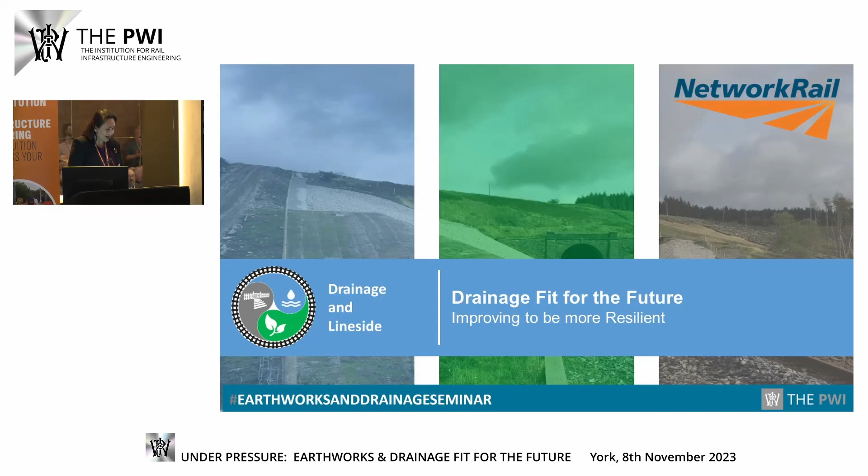I want to talk a little bit about our approaches, why we did those approaches, what we hope to achieve, and what still is left to do. And the first thing for me that was really clear is regardless of incidents and changes and recommendations, if you want change, there must be a desire and discontent to change, because otherwise you're shoving things down people's throat and it ain't going to work. We all have to say, actually, we do want to change, and therefore we will change. And so some of the things I'm going to talk about is how we've done that and what's there going forward.

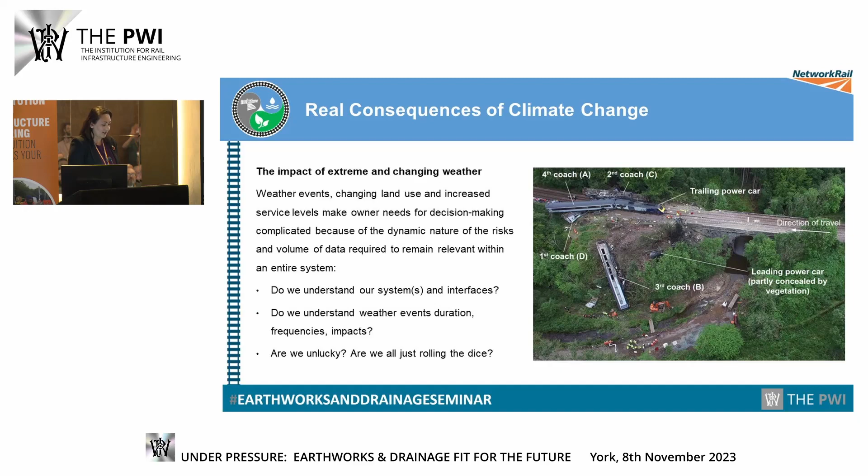You've recognized the photograph from a very recent presentation that you've just seen. That is Carmont. Carmont was a massive catalyst for us to actually accelerate some of the things that we were already working on. As Juliet had mentioned, there were things in the pipeline. There were things that we were already talking about doing. And post Carmont, with the recommendations both from RAIB, internal, as well as the task force, that accelerated the delivery of some of the things that I'm going to show you and talk about in this very limited 20 minutes. And happy to talk more with some of you about what else we're doing outside of this.

So we've got some massive challenges, right? Climate change is here. It's now. It's not a project thing. It is actually here. We have more extreme and adverse weather events, unpredictable weather patterns. Where's the water going to be? How much is going to be? Where is it going to go to? We have heat as well as too much rain. We're going to see intense rainfall covering shorter periods of time, and we're going to see longer, hotter summers. So you almost have too much water or not enough water.

We have legacy assets. There's currently about 500,000 drainage assets recorded in Ellipse, our master register. These drainage systems were designed on older standards that didn't consider climate change and the resilience that was needed. So these assets that are currently in the ground are tested in these extreme and adverse weather events. Sometimes we don't pass those tests. And the frequency and intensity of that testing is happening more and more. So we've got a massive challenge here around legacy, moving forward and changing the approach that we are using for the design, construction, the evaluation of drainage.

So focusing specifically around drainage and rainfall, the consequences of extreme and adverse weather events are failures not just for the drainage system itself, over-exceeding, flooding, etc., but it has a consequence on other asset groups. So washouts, landslips, wet beds, track geometry faults, track electromechanical faults, water and electricity don't get on. You see a lot of negative impact when drainage doesn't perform as it should on the railway as a system as a whole. And so following on from what Julian said, it is one system, the drainage system sitting in the railway system. We should not look at things in isolation here.

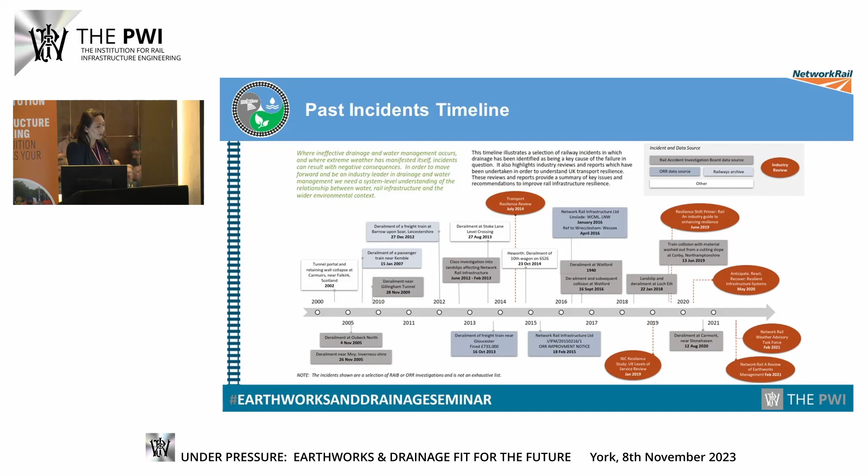And you see there's a lot. Almost every 2 years there was an incident. So that's quite a lot. There's quite a rich history, a lot of reading and context. So why aren't we quite learning from these past incidents? What is going on? I think there's two things that happen.

One, if we look at an incident in its own self, you only stick to the events that are in that one incident, and you don't start to look at the wider picture, the patterns of what's happening in other places. So you could lose that learning if we just focus on one thing. So look wider. Where else is it happening? What's the bigger picture telling us?

The other thing is, if we only look at it from an asset-specific silo perspective, it's a drainage failure, it's an earthwork failure, it's a track washout, we lose the causal relationship that is there in some of these. We don't live in a seismic zone, so earth doesn't usually move on its own. It's something that's creating that movement. I say to you, it's water. Where is it coming from?

Rain, saturation, oversaturation, etc. Ballast doesn't just wash out one day because it just doesn't feel like being where it wants to be. It's water and the energy surges, that potential kinetic energy that's pushing that stuff away. We need to recognize that and appreciate that, and we need to manage it. We need to manage it today and move forward.

So looking at these, and these are not all, by the way, these are the big ones. These are the RAIB reports, the ORR reports. These are not all the incidents. We have internal reports as well that we looked at. There's a theme that appeared a few times: not having an effective strategy, competency, weather exceedance, exceeding our expectation. We were caught unawares. We weren't aware that this was going to happen. Those started to have causal links, so recommendations leading to other recommendations leading to others.

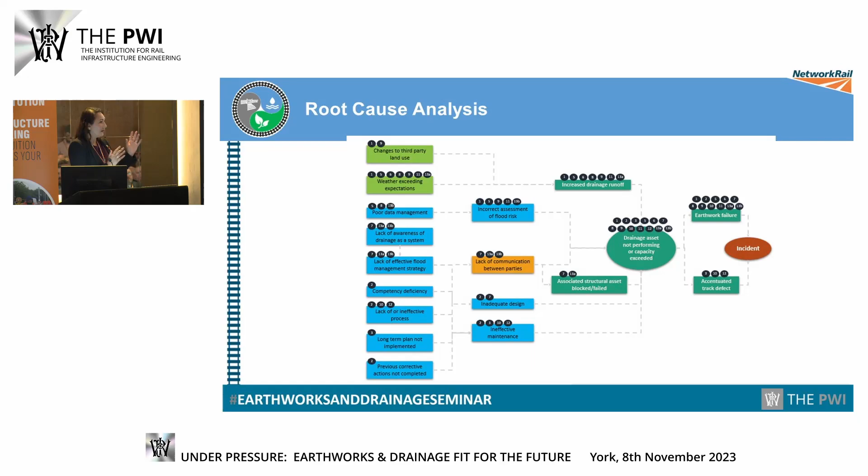Well, I'll tell you now, this is one sexy bitch up here, right? Not me, drainage, right? She's causing all sorts of problems out there on the railway. And she's high maintenance as well, let me tell you. We need to focus on her because she's causing some problems.

I said I wasn't going to swear, I just swore, sorry. Where's Peter? He doesn't have to wind me up. Yeah, you don't have to wind me up. There you go. You get £1.

So multi-pronged approach. Okay, how are we going to address this? Not just Carmont recommendations, but past. Let's learn together. So let's make a change. Let's not be where we were. Let's not repeat the past. Let's move forward. So it sounds a bit boring, but strategies and policies.

Well, the purpose of a strategy is your long-term vision. So we want to change, but what do you want to change into? I don't know. I just know I'm not happy with what's happening now. Okay, so the first question you need to know is, well, what do you want to be and where do you want to go? So that's what the drainage technical strategy was.

As a collective group, we got together. What are we not happy with? And just get it all on a piece of paper or Miro board at the time. Just get it all out. It's very therapeutic. This isn't right. That's not right. This isn't working. Great. Well, let's flip that now.

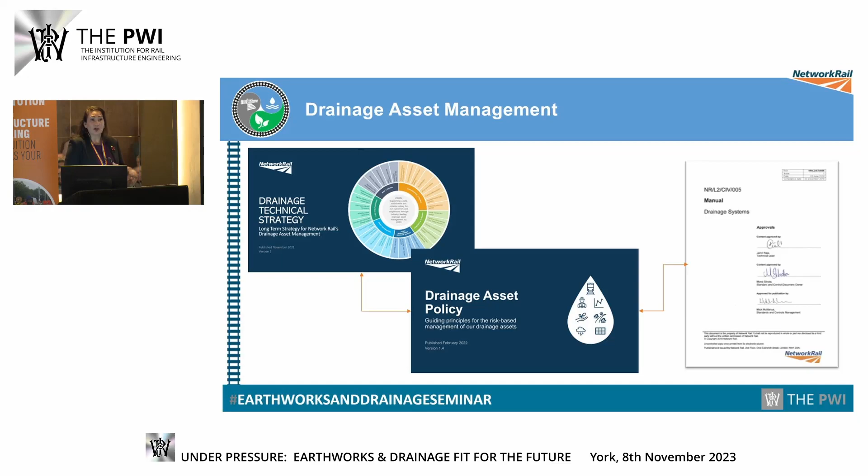So challenges we got for CP7, what are we going to do? We need to mature. We need to carry on chipping away at getting better and better at our maturity. We need to start applying those adaptive approaches to our business planning to say, if I get this amount of funding and I deliver this bit of work, I'm going to achieve these benefits and get those benefits, start measuring those afterwards. So that's happening at a very, very high level.

More detailed level, we're updating the standards to strengthen our terminology around what is vulnerable assets, what is catastrophic failures, what are we talking about when we talk about different intervention levels. And we're also updating our standard detailed drawings to provide better designs, more blue-green solutions, more solutions that think about how water and drainage's components can possibly fail.

So what we're talking about here is, for example, let's not put French drains on steep slopes with infill material. We're just creating water slides that are pointed right at the track. Let's do something differently in that space. And what is that difference? That's the sort of things that we're doing right now. So that's still coming in the next sort of year or so.

In doing just the drainage work, yes, water is managed by drainage, but it is not the only asset group that manages water. Water influences track, signaling, electrification, earthworks, every asset group and every function on the railway: design, inspect, maintain, construct, evaluate, all are impacted by water.

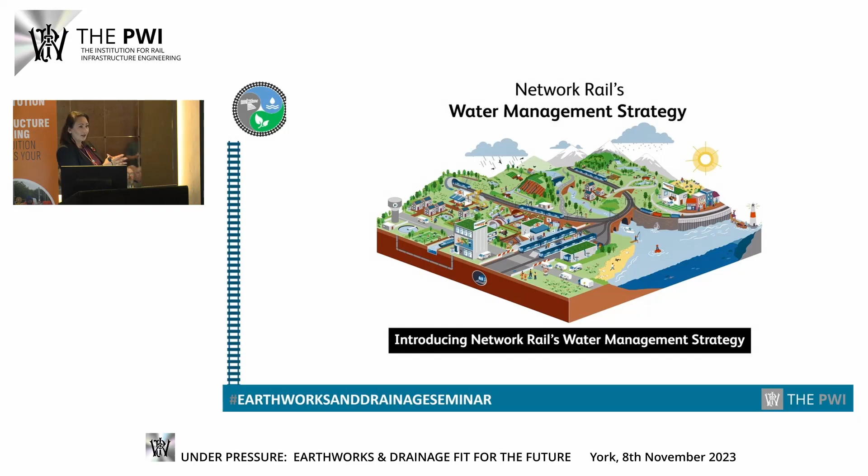And so what we realized is that in just writing a drainage technical strategy, we weren't addressing the big railway and water interfaces. We could only do it as an asset. And so in Network Rail, we pitched to the chief engineer that we needed a national level water management strategy. And I'm going to play a little video for you on that now.

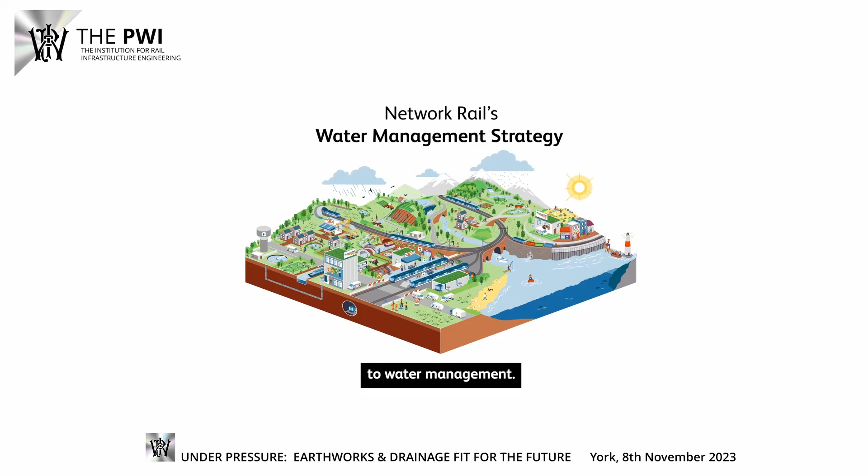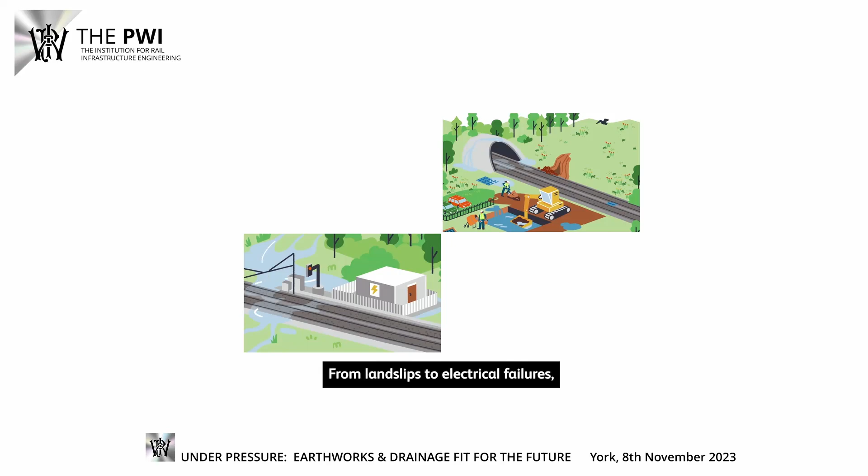Introducing Network Rail's water management strategy. This strategy is going to change our approach to water management. But before I tell you more, this is why we need it. Climate change is happening now, making the consequences of extreme and adverse weather a reality for all of us. Flooding and droughts already cost Network Rail millions of pounds a year and are only likely to get worse. From landslips to electrical failures, weather-related incidents affect the safety and performance of the railway, resulting in penalties, delays, poor environmental impacts and a disrupted service for our passengers.

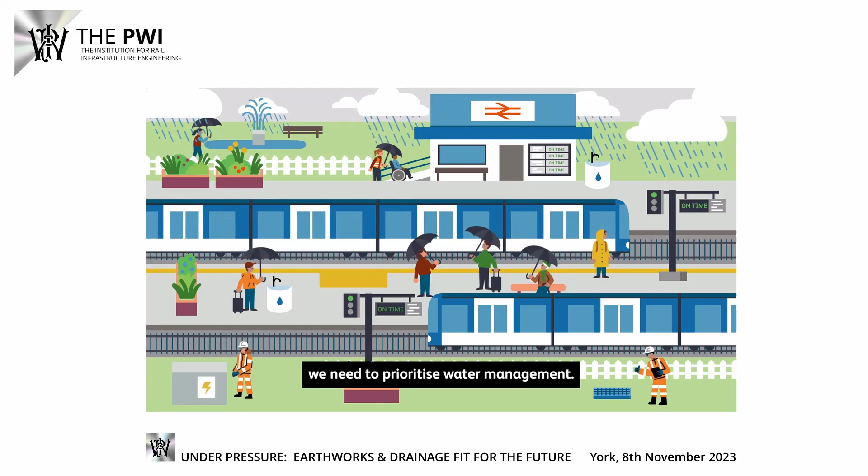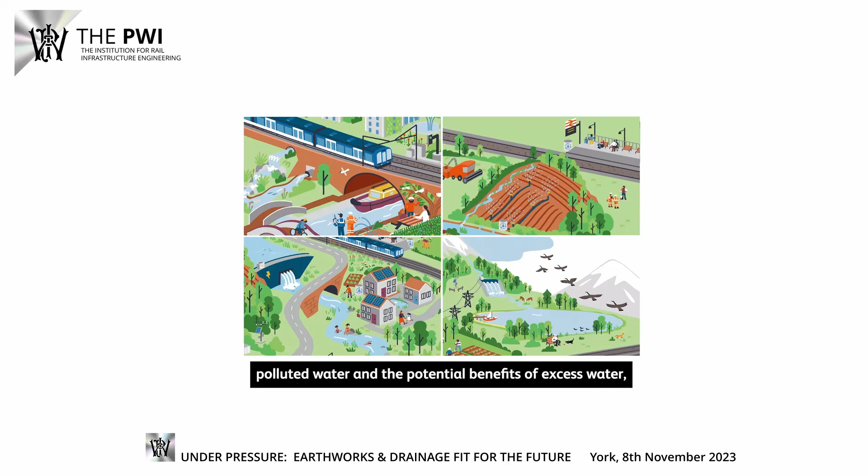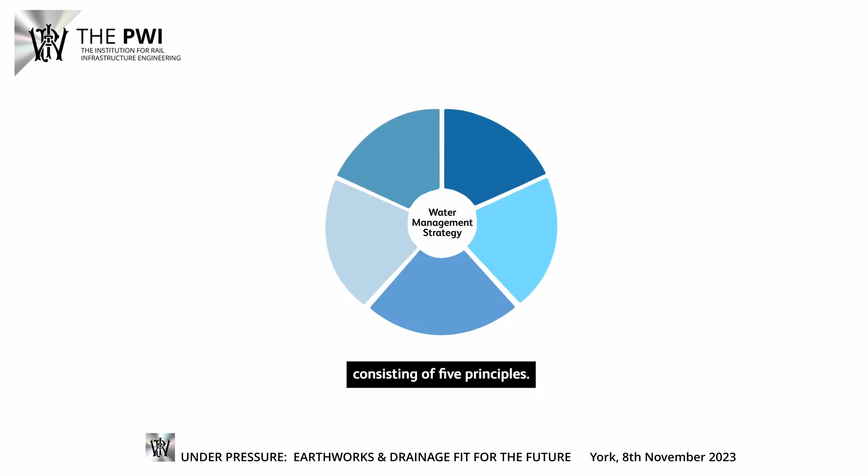But we can improve. Network Rail is committed to running a reliable railway network. To do this in today's world, we need to prioritise water management. This means dealing with the water that affects all of our railway assets. We need to grasp the wider challenges of water scarcity, polluted water, and the potential benefits of excess water, in collaboration with our neighbours. We've developed the water management strategy consisting of 5 principles. These are: take a holistic view, be resilient, use less and recycle, keep it clean, and unlock wider benefits.

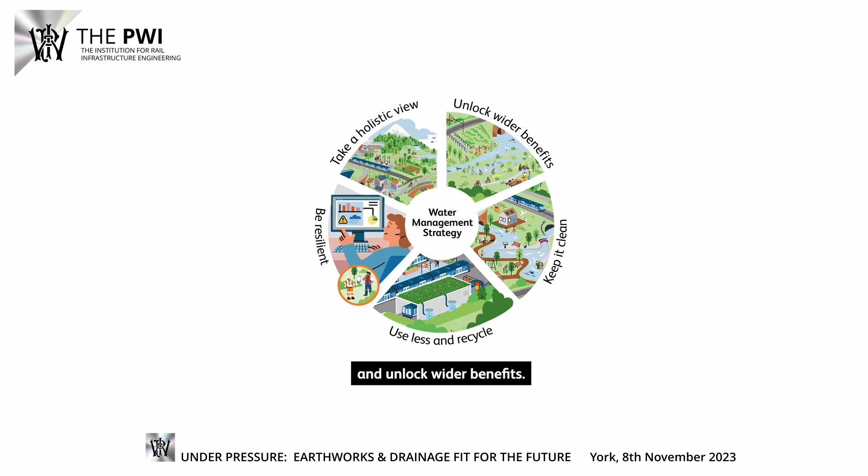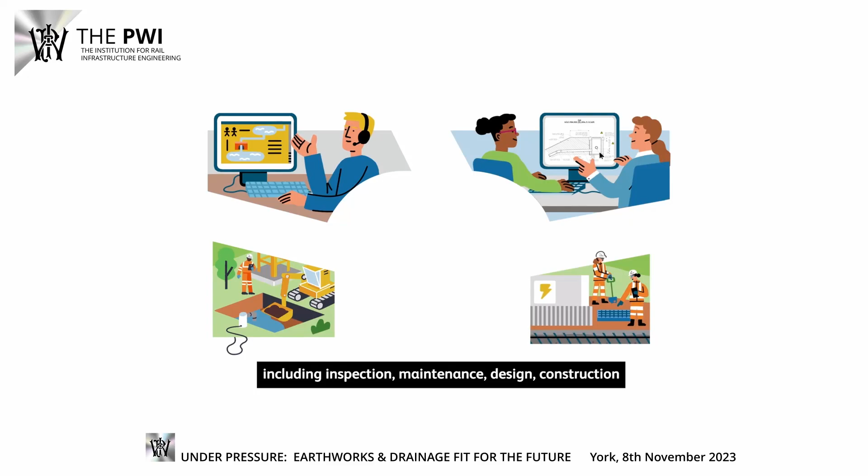We are the first in the transport industry to develop a water management strategy. It's an opportunity for us to demonstrate our proactive leading approach. As the 4th largest landowner in the UK, we can make a profound impact. Water affects all of us on the railway. Every asset group and all life cycle activities, including inspection, maintenance, design, construction and asset management, have a part to play. We all have a responsibility and we need to start today. So, how do you make a difference? Start by engaging with the water management strategy. Go to the My Connect page for more information.

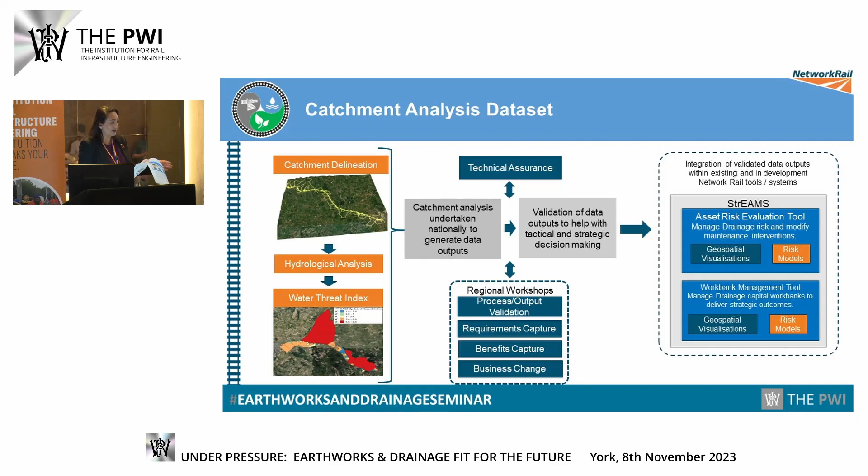That's CP7, to push this information out more, get others to use it, and of course, as usual, we update the data sets as we get more fresh data in and new and better data. I'm going to try to speed it up, I promise.

Technologies, right. So I talked about some of the documents we've written. We're doing a lot of technology development. So catchment was one. There's a lot of tools coming out. Basically, what you've got is a decision support tool, a risk model, a workbank management tool, an asset risk evaluation tool. We've got an FTE calculator that basically says, based on the minimum requirements of our standards, how many people do we actually need to do the minimum requirements of a standard? I don't know of any other asset group that's ever done that.

It came out of a recommendation from Carmont. You need to have the right number of people to do inspection and maintenance of your assets. Well, how many people is that? So we built a calculator off of that. The adaptive planning tool I slightly mentioned as well, and I'll talk a little bit about competence in a second. But tools like StrEAMS and asset risk evaluation, these are really leading the way.

We're actually even challenging Microsoft to fix some of the things that don't work for us. So Microsoft at a global level are changing some things because of what we're trying to do. And that surprises me sometimes. Little old drainage tool trying to come through going, hang on, big old Microsoft, you didn't figure this out? Okay, we'll challenge you to do it. So there's a lot of technologies up there, a lot of tools.

The whole idea is that they will all come together under StrEAMS. StrEAMS is the one-stop shop for all of our data and information so that the decision maker for drainage can go into that, and it could be maintenance, it could be designer, it could be the asset manager who's like, right, get me into one place, tell me what I need to know about my condition, my assets, the location, about history of flooding, washouts, what's happening with track geometry, bring it all in one place, all mapped out, geospatial, happy days.

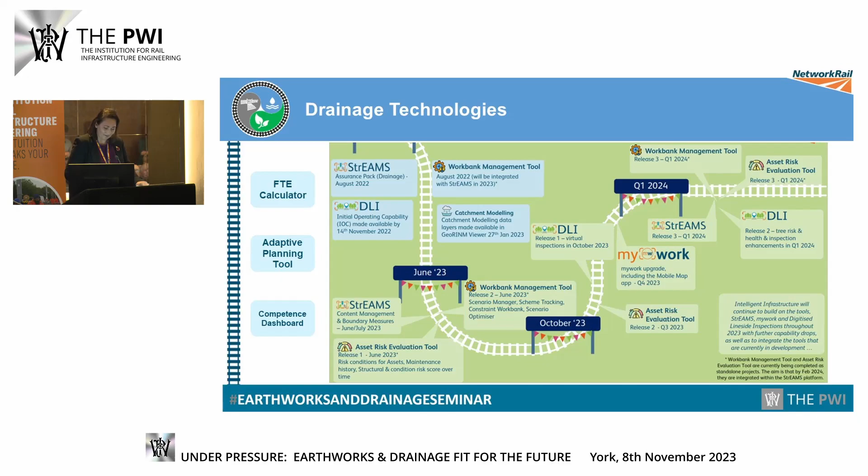Honestly, it is. Of everything that we do, the most important thing that we're doing is our people, and we're looking at the training and development of our people. There's a competence standard now that defines the competencies and the different proficiencies linked to those competency statements.

We have created two guidance notes, one on route to competence, because competency in the competence framework is very complicated. It's not just do training and do one thing. It's training, it's experience, it's academic, it's professional affiliations, it's further learning, it's mentoring, it's saying, I need to know something to do the job I am doing today, but tomorrow I want to do a different job. So what do I need to know to do that future job?

So how do I create basically a career pathway? How can I develop and go forward? Where do I go next? If I'm in drainage and line side, AKA off track, where do you go next? What branches out, and where can I go for more? So the competence framework is quite complicated in its own right, and the handbook explains some of that. So what do we do now?

We're developing e-learning material, and some practical face-to-face training material. The e-learning material will be launched later on this year, which will give people an awareness proficiency. And then we'll have practical face-to-face, which will give folks an understanding proficiency. Then they go do the job, that will give them the applying proficiency. And then from there, you get leading and experts. But we're focusing on understanding and awareness first, and then folks use it on the ground and give us the feedback. So that's coming now, and that will happen through CP7.

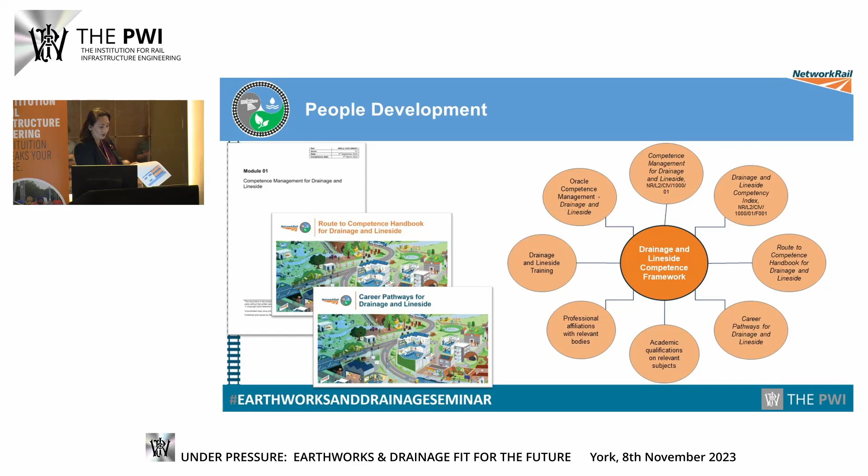And so I'm going to close with four points to summarize the challenges for CP7, but what we've done as well. So number one, it's here. Climate change is here. It's now. You can't ignore it. The risks are today. So you either step up and meet the challenge, which means we've got to change some of the way that we're doing things, or we face the consequences. Facing the consequences is going to cost you a whole lot more. It's going to hurt a lot more. So let's meet the challenge and let's change where we need to.

Change and improvement needs to be multi-pronged. Just doing one thing sometimes isn't enough. Historically looking back, just changing the standard, just changing the drawing, just changing one thing doesn't quite embed the change that we need. So multi-pronged approach: strategy, policy, standards, drawings, tech, training, boom, it's all coming. But that multi-pronged approach is what's going to create the change that we need, embedded change.

Plans need to be adaptive. They need to be system-based. There's the drainage system: track drainage and earthworks drainage. There's the drainage system that sits in the railway system, that sits in the UK, that sits on planet Earth, part of the water cycle. There are systems upon systems. So you need to be adaptive because your funding's changed, because we've learned something new, because a new data set has appeared, catchment, and I can now use that. So responding to known and emerging risks and being adaptive in that approach is key.